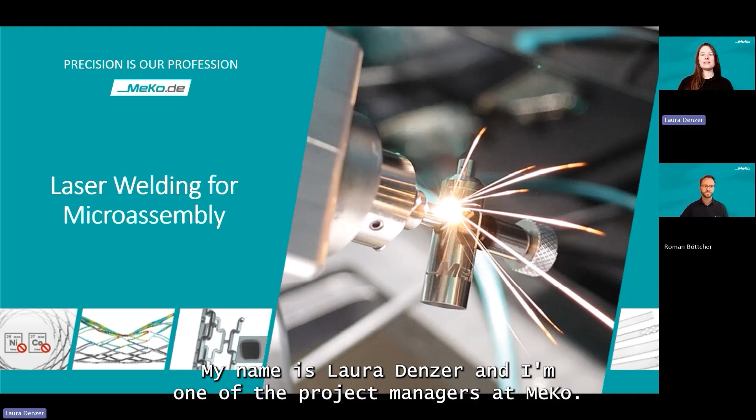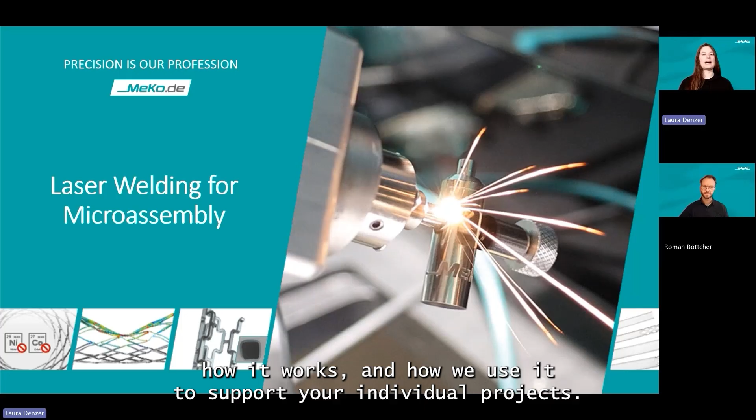Our expert today is Roman Böttcher from the head of production team, leading programs across stainless steel, cobalt, chromium, precious metals, and polymer parts. In this session, we'll focus on laser welding for microassembly, how it works, and how we use it to support your individual projects.

Here's how we structure our time today. We'll start with a general overview of MeKo MedTech to give you some background, then move on to the main topic, laser welding for microassembly, and finish with questions and answers.

Before we dive into the details, let's take a moment to look at what drives us at MeKo, our mission: safe, innovative, and affordable. These three words define how we approach producing components for medical devices. They guide the way we work, how we think about quality, and how we collaborate with our customers to improve healthcare around the world. Our goal is to make medical technology better, more accessible, and more reliable, knowing that every component we produce plays a role in improving a patient's life. That's not just a statement on paper, it's the mindset that unites all of us here at MeKo.

Behind this mission stands a strong team of more than 400 dedicated professionals, all working with passion, expertise, and a shared sense of responsibility. What once started as a one-man operation in a small garage has grown into a globally active company, committed to supporting our customers with high-precision components and dependable processes.

Our company is ISO 13485 and ISO 9001 certified, as well as FDA registered, reflecting our commitment to the highest standards of quality in everything we do.

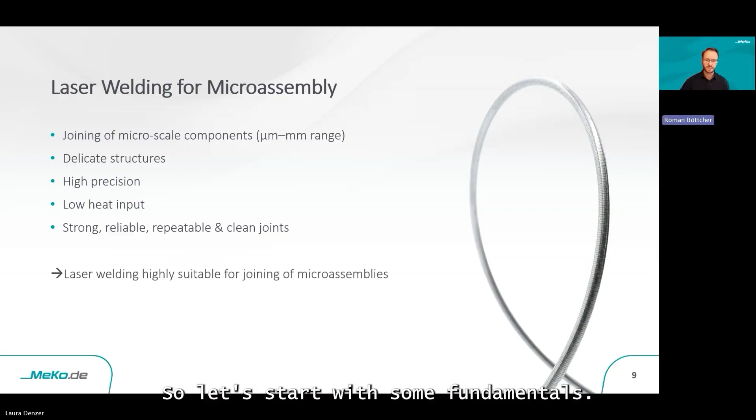So let's start with some fundamentals. Welding in general is a joining technique. A local volume of two joining partners is melted. The melted material of these two components or several components will blend, and after cooling down, a common weld is formed, which is permanent.

It can't be dissolved independently from the other material. Filler material can be used as an option, but it's not that common for the type of laser welding we are doing for mechanical components.

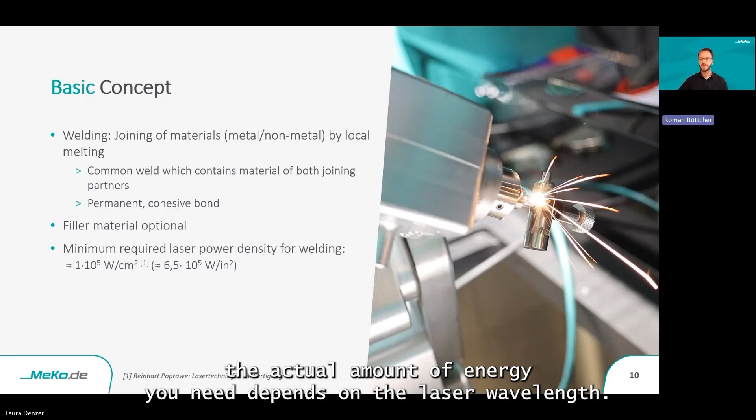You need a certain energy to melt the material. It's in the range of 100,000 watts per square centimeter, or 650,000 watts per square inch. But please keep in mind that's only a rough number, because the actual amount of energy you need depends on the laser wavelength you use, the material, and the geometry.

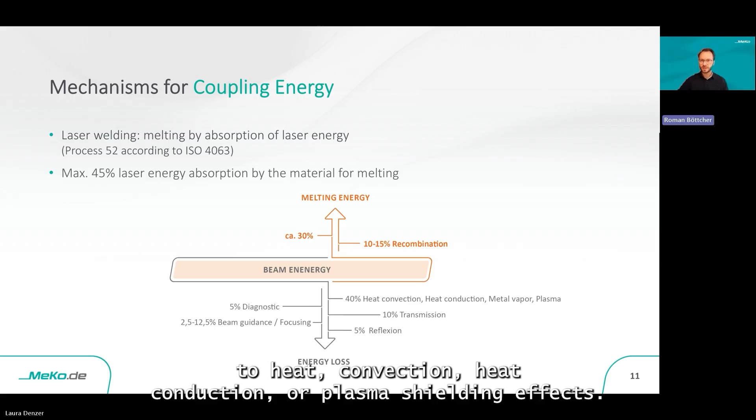For laser welding, the mechanism for coupling the energy to melt the material is absorption, but not the complete energy of the laser beam can be used to melt the material. In the best case scenario, only 45% of the laser energy can be used to melt the material, and there are some losses due to heat conduction or plasma shielding effects while welding. And of course, there are also losses in your laser guidance system from the laser source to your workpiece.

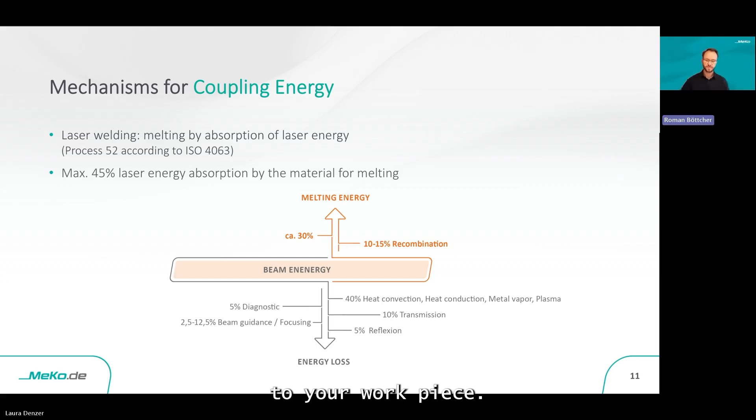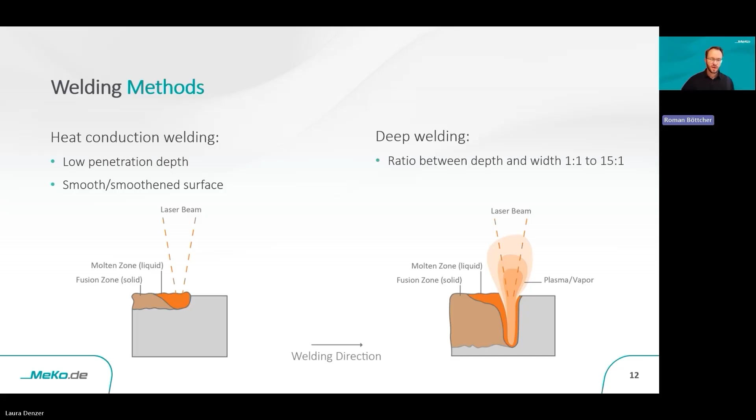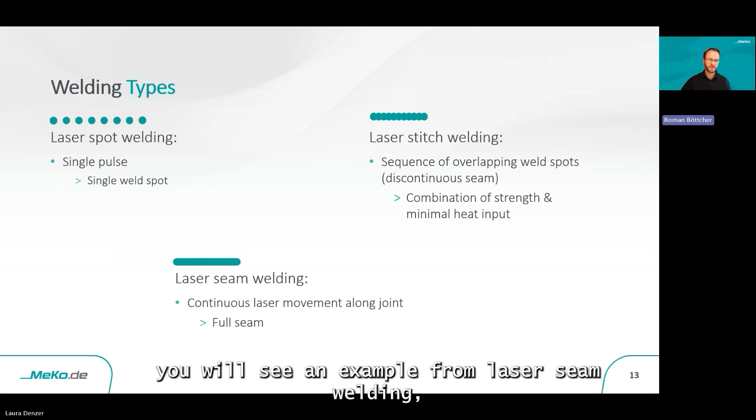And last but not least, at the bottom of the slide, you will see an example from laser seam welding. There you will have continuous laser movement, along your joint, so that you will get a full seam.

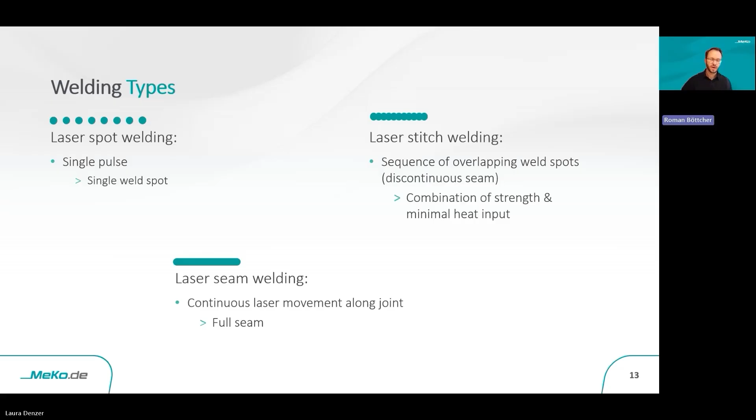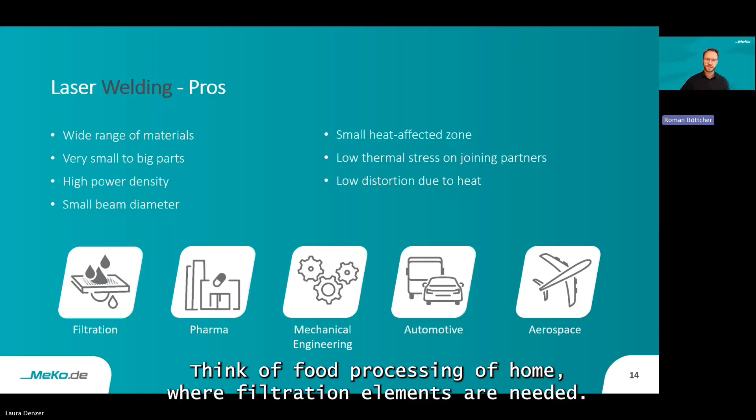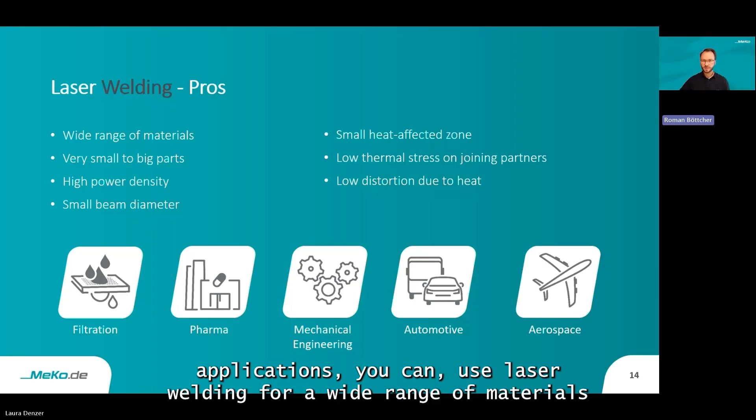Laser welding has a lot of benefits. Let's start with some technical benefits. These benefits are not only there for our medical application, but also for other applications. Think of food processing or pharma, where filtration elements are needed that have to be welded with a very clean surface that is easily cleanable, but also strong. And speaking of strength, that's typically the domain of mechanical engineering, automotive, and aerospace. For all these applications, you can use laser welding for a wide range of materials: metals, metal alloys, and even some polymers. We are able to process small parts and very big parts as well.

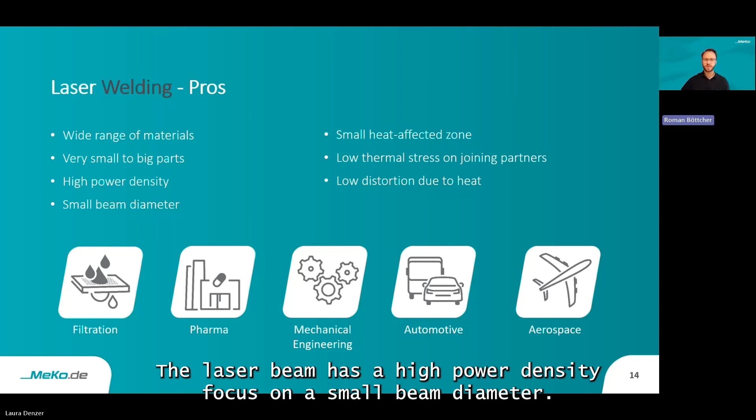The laser beam has a high power density focused on a small beam diameter, so you will get a small heat affected zone. You will get only low thermal stress on your joining partners, which results in low distortion due to heat.

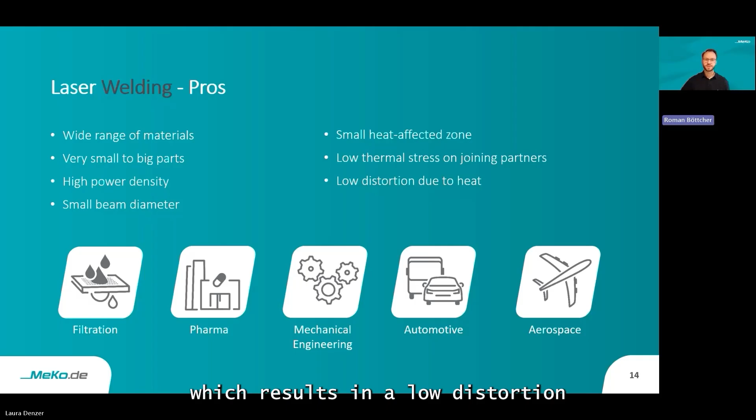Looking from the process side, laser welding has the benefit that it's contact-free, and there are no tools getting in contact with your welding partners, with your components that are prone to wear. The process is well adjustable and repeatable. You can achieve high feed rates because you have high power density, which makes the process efficient. You will get good seam surface and seam properties, so oftentimes you can reduce the amount of work in post-processing.

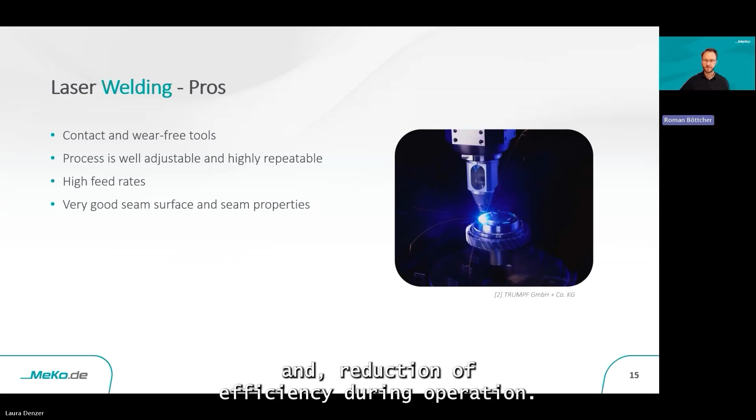Why is laser welding used there? All these components are already finished. The spur gear has a sophisticated tooth profile, and you can't afford to have a high heat input into these parts because you can't afford to have distortion, a bending of the gear. Otherwise, you will have wear and reduction of efficiency during operation.

There are a lot of benefits for laser welding. There are also some requirements you have to meet. Your components that you want to join have to be precise. You can't afford to have a big gap between the components when you would like to weld them. With laser welding, you need a precise and reliable positioning system to position your part under the laser beam.

Oftentimes you also have to plan your welding sequence very well to get accessibility to your welding position, but also to minimize heat input even further. You need a consistent laser source. And of course, every time when you're working with laser radiation, you have to have something that protects against this radiation. These are all requirements we are used to because we do a lot of laser welding and we have a lot of joy doing it.

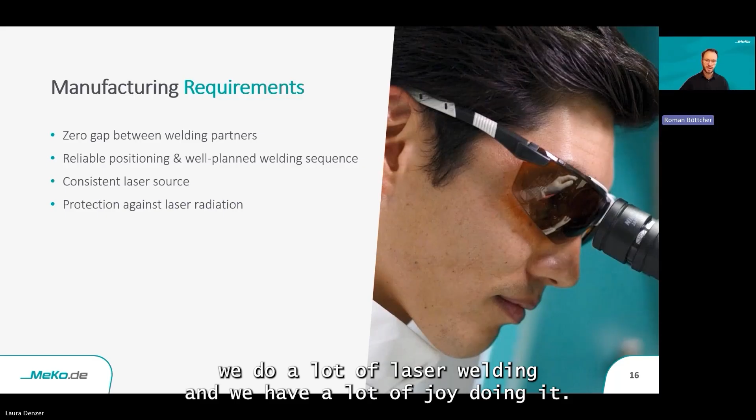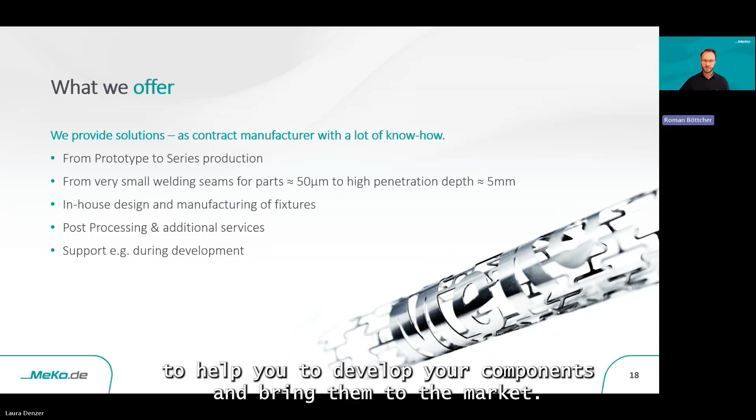As Laura already said, we are able to manufacture components for you with different processes, and laser welding is one of them. We are a contract manufacturer, but we would like to be your solution provider as well, because we would like to give our know-how to you to help you develop your components and bring them to the market. We are able to do prototype manufacturing, but we can also manufacture parts in series production in bigger numbers.

We are able to process very small parts. Smallest we had in-house was 50 microns. Please challenge us with that. But we are also able to process bigger parts where higher penetration depths are needed.

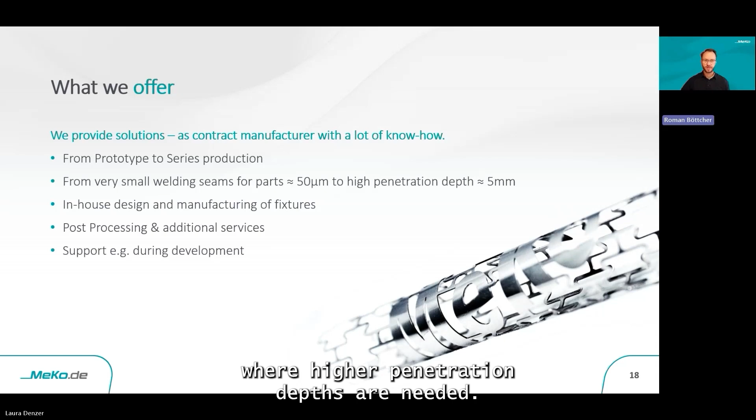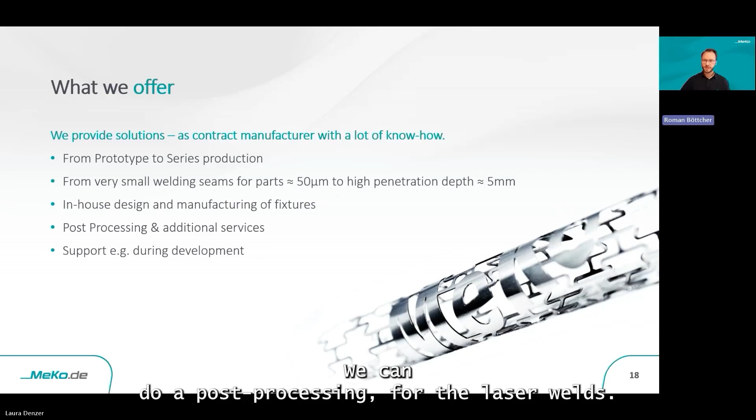If a fixture is needed to do the laser welding to position the parts under the laser beam, we can design these fixtures and manufacture them in-house with different methods, even 3D printing, which is very fast, so that we can get into production very fast. We can do post-processing for the laser welds, and of course we are able to offer you additional services for your parts that were laser welded.

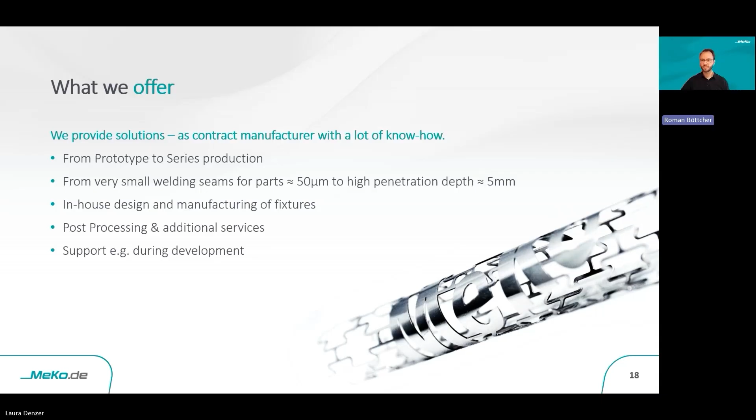But we are also able to support you during development. Please get in contact with us so that you can design your part to make the manufacturing very efficient at the end.

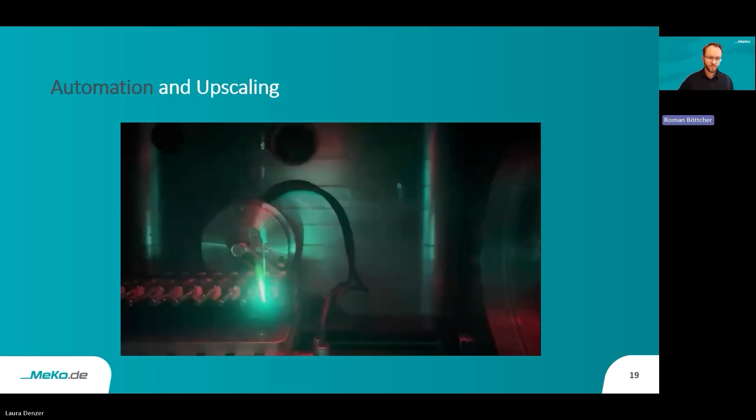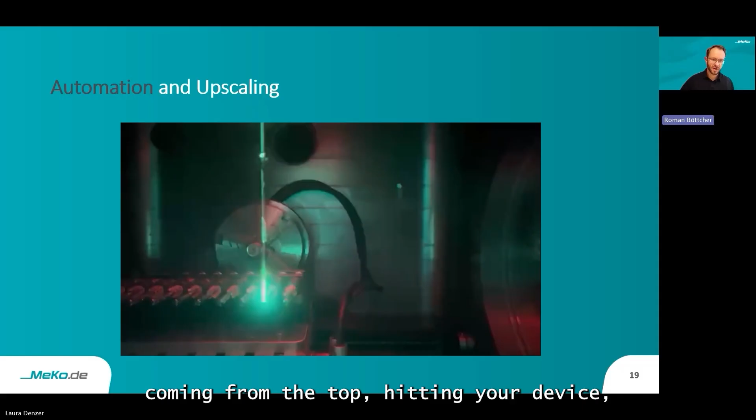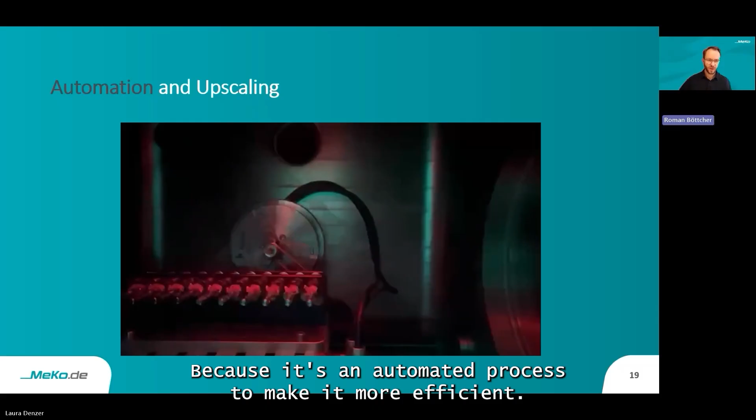Okay, let's have a look at an example for a laser welding process at MeKo. This is a video of a laser welding that was done in a vacuum chamber. You see the laser beam coming from the top, hitting your device, a cylindrical device that sits on a rotating axis. You see that there are several devices in this vacuum chamber because it's an automated process to make it more efficient. What is done there is a cylindrical part with an end cap, and the end cap is welded with a laser weld around the circumference to the cylindrical part.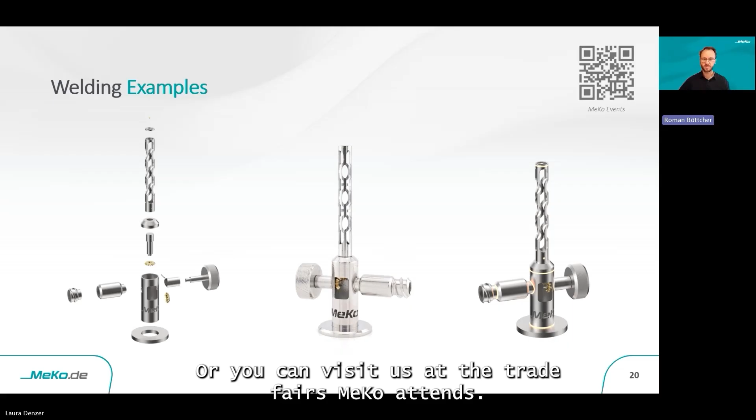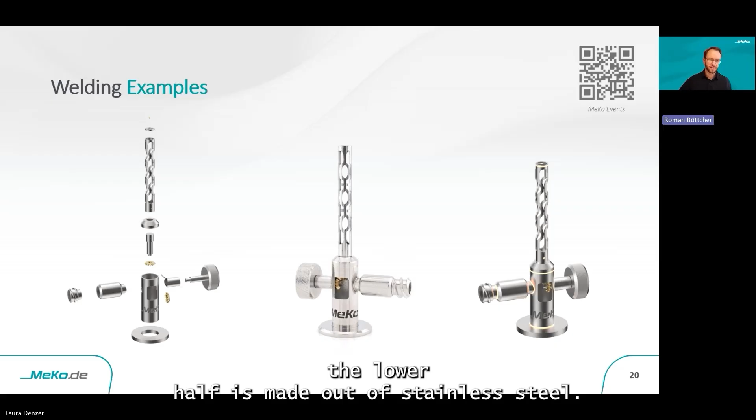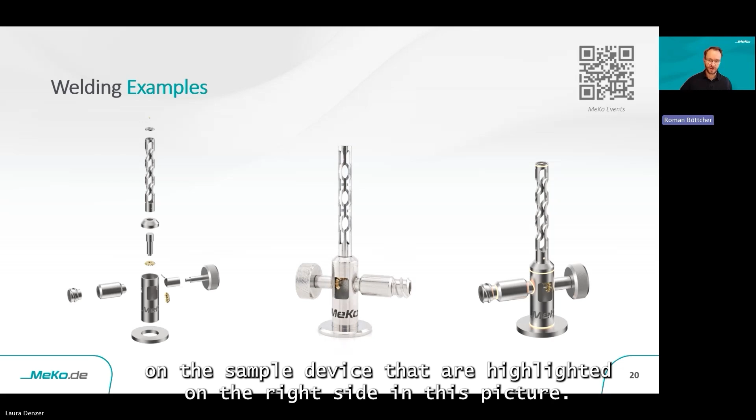So on this slide, you see a picture of our sample device and some rendering views. On the left side, you see that the sample device consists of several components, 14 components. The lower half is made out of stainless steel, the upper half is made of nitinol, and both halves are connected with the help of a small pin with a diameter of 0.5 millimeter. There are several welds on this device that are highlighted on the right side in this picture, and there's even a very tiny marker on top of the device.

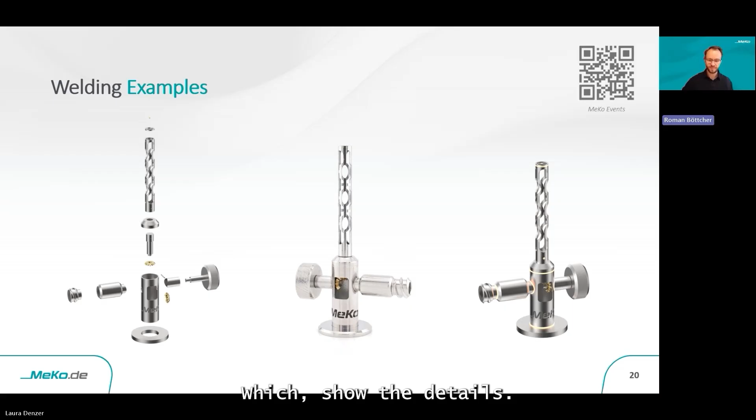I will show you some pictures in the next slides which show the details. Here we are. On the left side, you get an impression of how tall the sample device is. It's about 7 centimeters tall. On the upper right picture, you will see the marker device that sits on top of the nitinol part. It's a 580 micrometer tantalum marker that is welded with a flat weld to the nitinol top part.

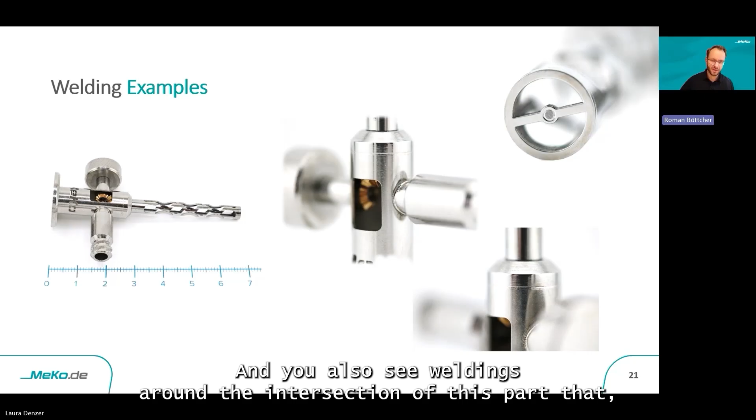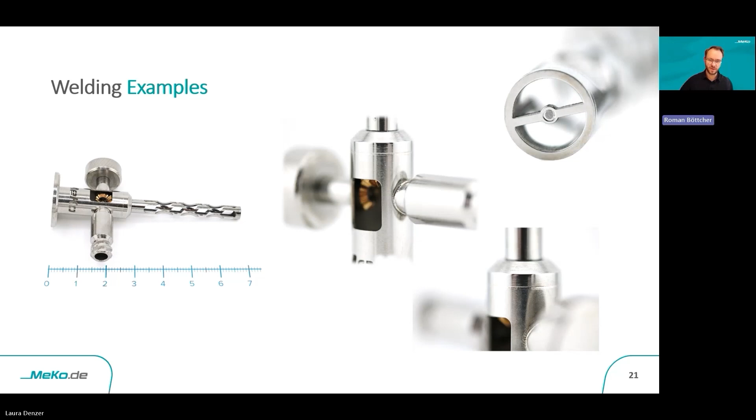You see weldings around the circumference of the lower half, and you also see weldings around the intersection of these parts that are welded in a rectangular arrangement to each other. This joining path is more complex than all the others, and I will show you how we are able to join them in the next slide.

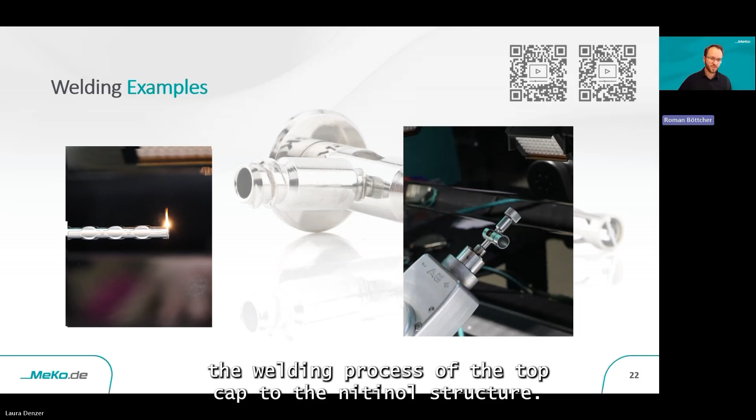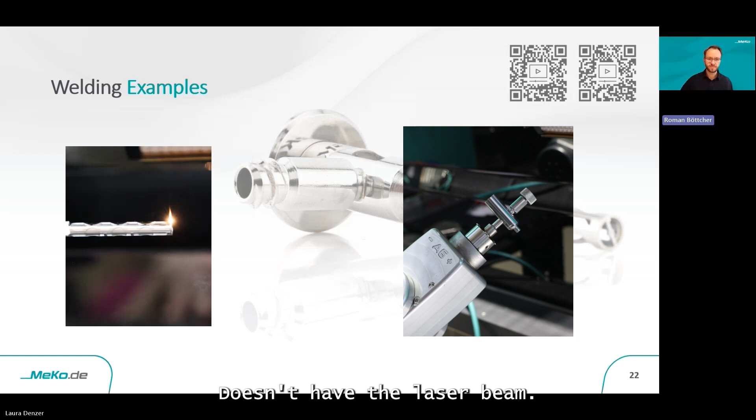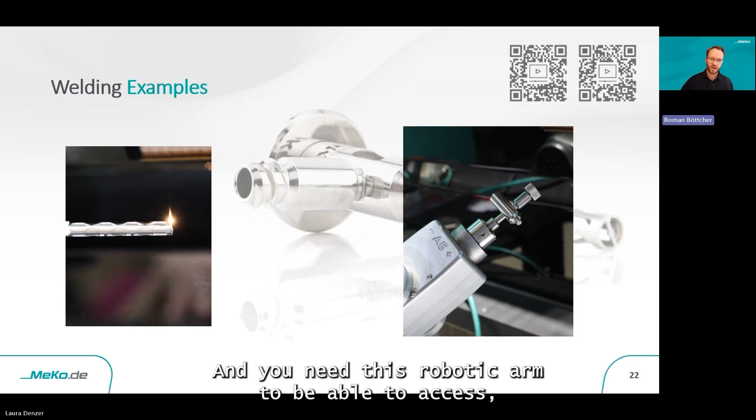You see the video of the welding process of the top cap to the nitinol structure. On the left side, it's a weld around the circumference of the part, and the nitinol part sits on a rotating axis which moves it underneath the laser beam. The video on the right side doesn't have the laser beam. It shows the movement of a robotic arm with the parts from the lower half fixed to it. You need this robotic arm to be able to access the welding joint at the intersection. It's a way more complex path you need there.

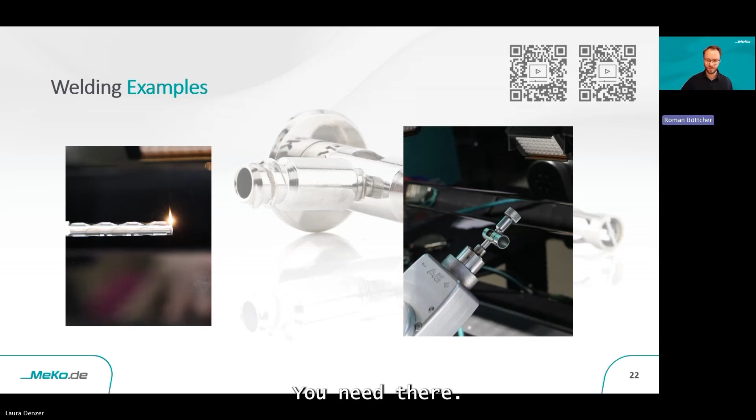Some other examples: on the very left picture, you see a small tantalum marker with a diameter of 70 micrometers that was welded to a stent that is not yet electropolished. The next picture shows a sphere that is welded to a wire, with the weld going around the wire.

The third picture shows a small tube equipped with an end cap that was welded to the tube, and you see a very smooth surface without sharp edges. The last picture in the row shows two metal sheets. You see the wall thickness of the metal sheets here, and these sheets are arranged in an X-like structure.

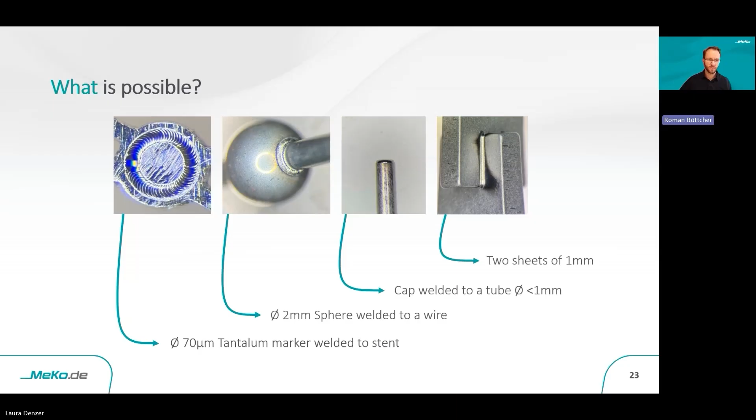As Laura already said, we have process chain. A typical welding process starts with an incoming inspection of the parts, some programming, and maybe a fixture has to be designed and manufactured. Sometimes the parts we get have to be cleaned before to get a clean weld. After welding, a final cleaning can take place, quality inspection, and we pack the parts before shipping them to you. I'd like to highlight something we do during welding and something we can also do after welding.

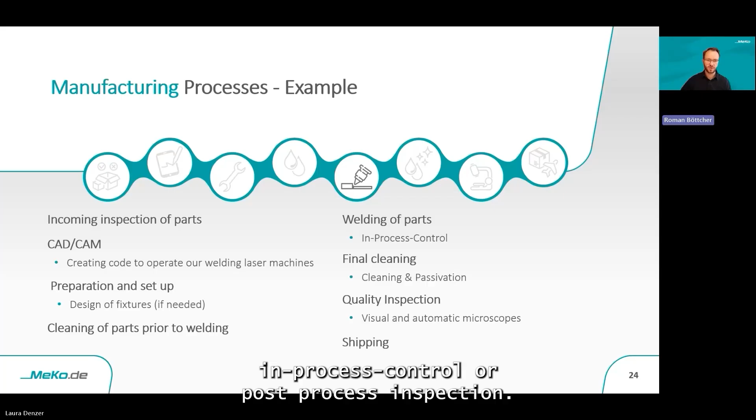That's the in-process control or post-process inspection. We use an optical inspection to check the quality of the seam, and we can also measure details on your devices to make sure specifications are met. We can do mechanical testing regarding the function of your device or assembly, like a pressure test or the measurement of extraction forces of marker elements. We can also perform basic mechanical testing like tensile strength testing or bending tests, and we can do cross-sections of the seams to perform grain size measurement.

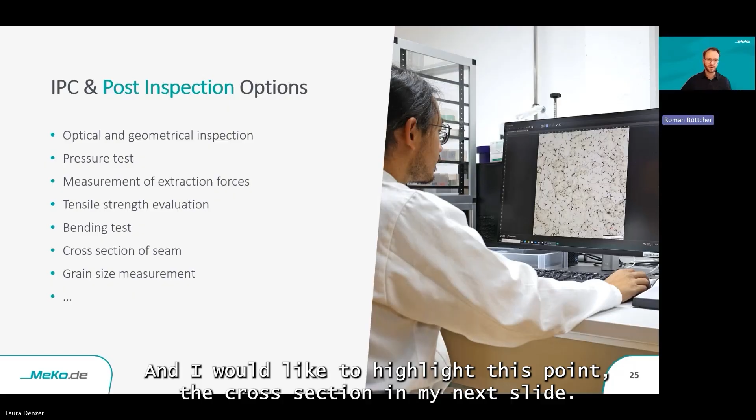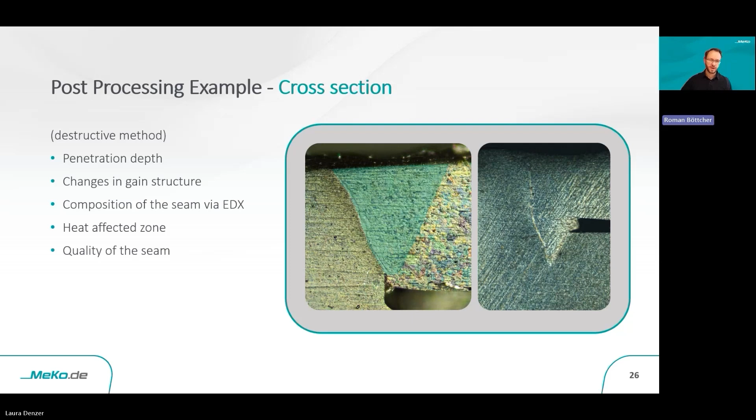I'd like to highlight this point, the cross-section, on my next slide. You can see two pictures of a welded component with the laser weld highlighted in green on the left picture. We use this cross-section to measure the penetration depth of the laser weld directly. We can look at changes in the grain structure of the laser weld, and we can look at the composition of the material inside the seam via EDX and take SEM pictures. We can inspect the heat affected zone around the weld in the base material, and inspect the quality of the seam inside.

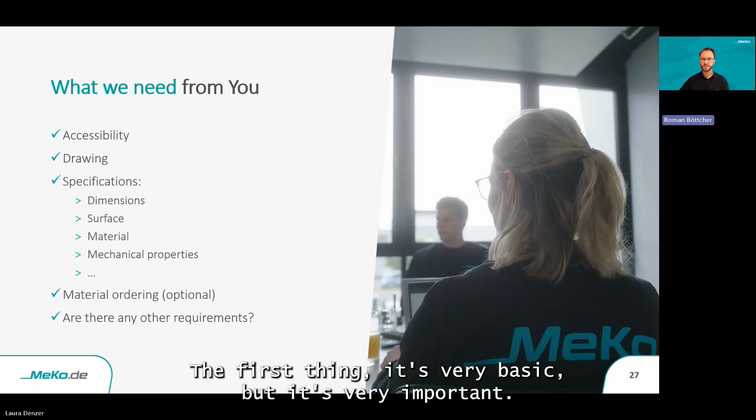To be able to weld parts for you, the first thing, very basic but very important, is that the joint has to be accessible to do laser welding.

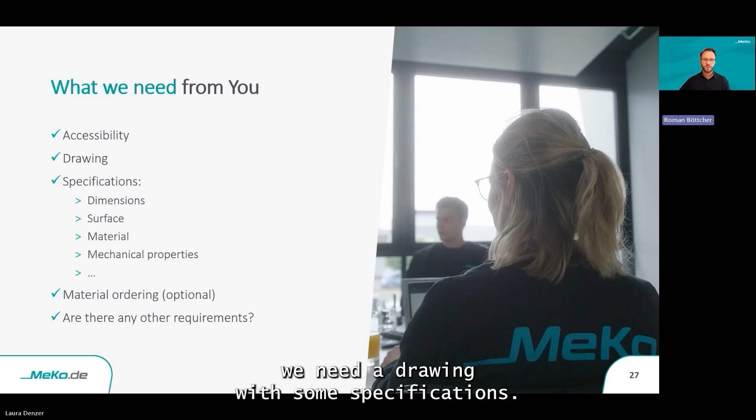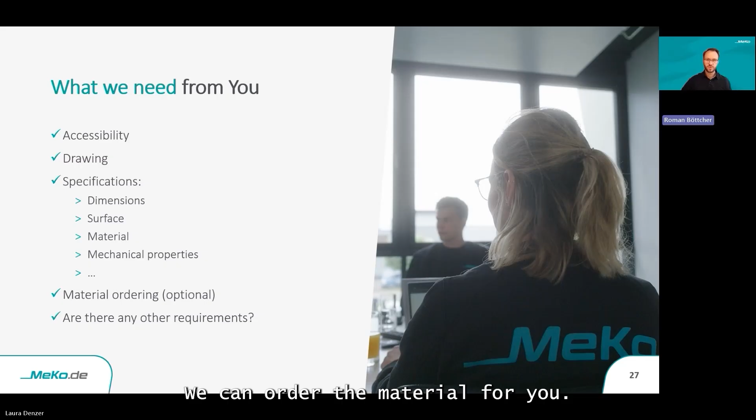If you would like us to manufacture parts, we need a drawing with some specifications, like dimensions, surface requirements, which material has to be used, and any mechanical properties. We can order the material for you, we can manufacture parts for you, but you can also send parts to us for the laser welding. And if there are any requirements for the laser weld on your components after welding, please get in contact with us.

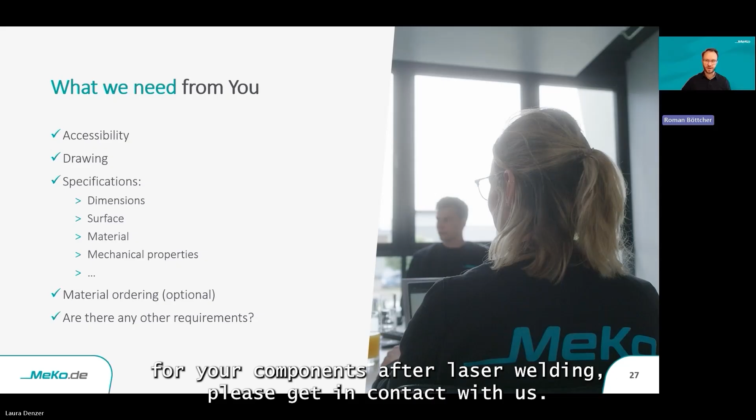I'd like to wrap up the webinar. For us, laser welding is highly suitable to join microscale components. It's able to do clean joints. It's an accurate process, consistent, and proven for high quality and high reproducibility.

Additionally, as you've seen today on the slides and during the presentation from Roman, MeKo is a reliable partner with very deep laser welding expertise. For over 30 years of our existence, we've been driven by innovation and precision, and so we are ready to support your microassembly challenge.